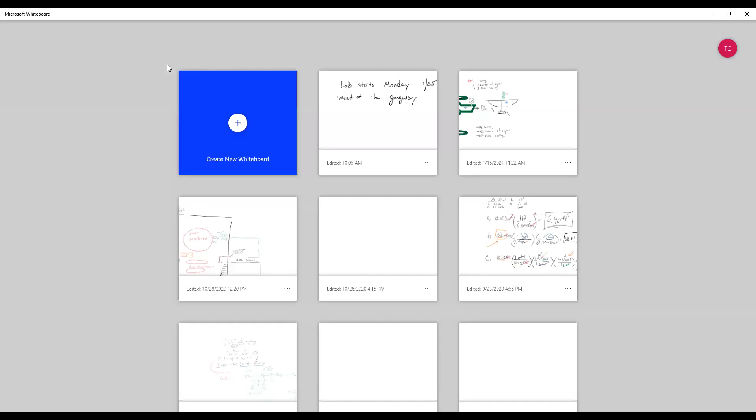Also, going from there, we are in, like I said, a working condition, so you have to be ultra aware of your surroundings. There's going to be deck plates that are up. Don't be walking backwards. Always be aware of what's happening around you. It's probably in a little bit more of a chaotic state than if we were actually out at sea.

So being in the shipyard, things are just going to be different from day to day. You may be walking around on the deck plate and all of a sudden fall through it because there's no deck plate there that day, and there's an opening to the tank below it, so you fall right into the tank. That's a lot of paperwork for me. You get injured, you can't go on summer sea term. Not fun. So be aware of your surroundings.

It's not going to be me teaching the lab, it's going to be first class lab instructors, about 4 per, depending. The only exception is Tuesday at 9, you have 3 because there's only 11 of you. Same with Thursday at 9, you guys are the lucky ones, there's only 6 of you in that class, so you're pretty much getting a one-on-one. You have 2 instructors. Everyone else, you're pretty much maxed out.

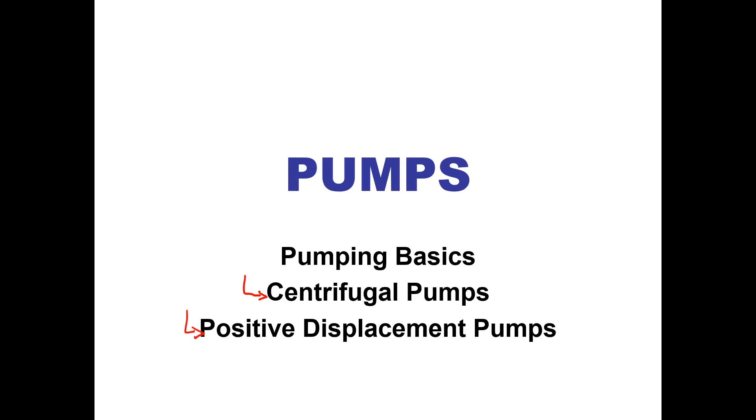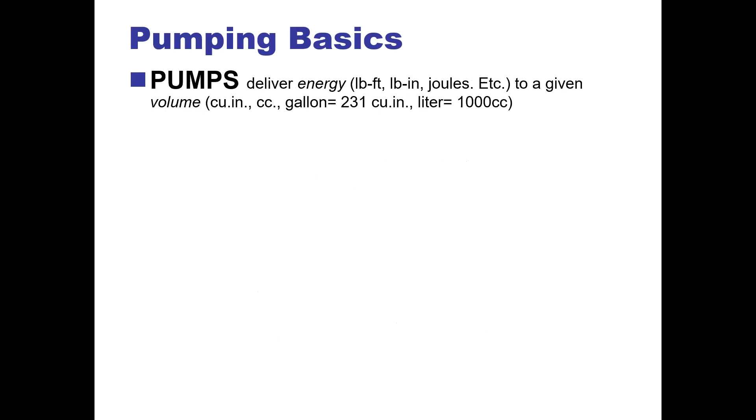Pumps deliver energy in foot-pounds, pound-inch, joules, etc., any unit of energy, to a given volume - so cubic inch, cc, gallons, liters. It's usually thought of as a force over an area, but it's also an energy per volume. That's how we get PSI, so you're always going to be looking at this and seeing what the pressure is coming out of a pump.

So energy gained per unit volume, pounds per square inch, or PSI. Pressure times flow is power - energy over volume times volume over time is equal to horsepower. So we have PSI times gallons per minute over 1714, that's just an arbitrary number basically, and we get horsepower. 1714 is just one of those units that, because it's imperial units, we have to use.

If we look over here, we just have pascals times meters cubed per second is equal to watts. Watts is the same thing as our horsepower, it's just SI.

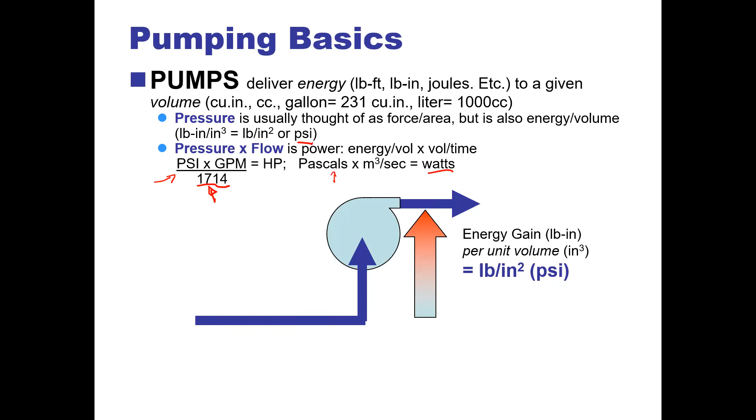So we have something called head. Head energy per pound of liquid, commonly expressed in feet, representing the vertical height of a static column of liquid, corresponding to the pressure of the fluid at the point in question. That's a lot, right? So we'll go over it, don't worry.

In general, a liquid may have three kinds of energy, that is the capacity to do work, maybe due to three different factors.

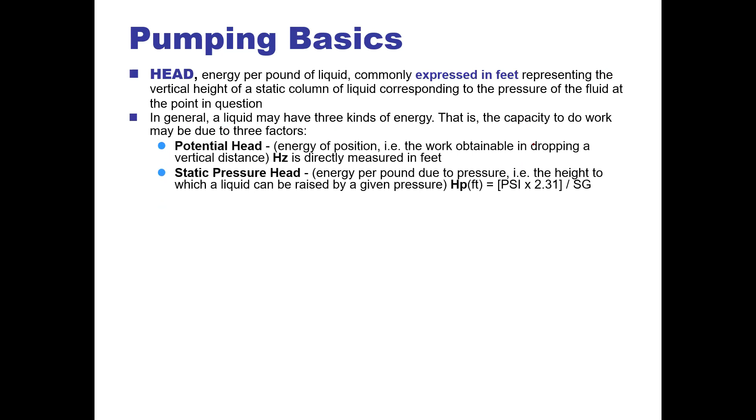We have potential head, which is the energy of position, the work obtained in dropping a vertical distance. And then we have static pressure head, energy per pound due to pressure, the height to which a liquid can be raised by a given pressure.

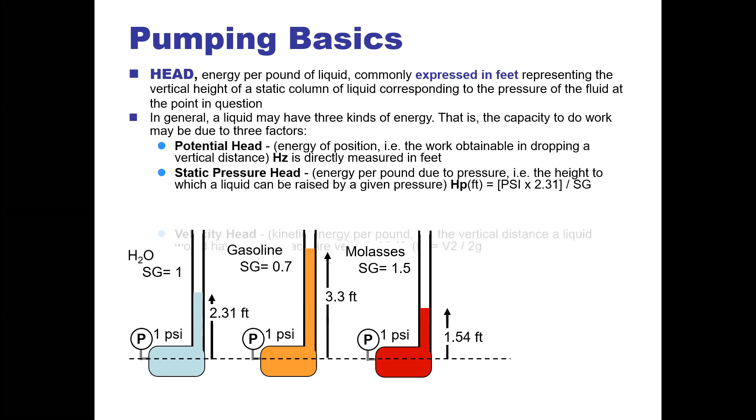Then we have velocity head, or kinetic energy per pound, the vertical distance a liquid would have to fall to acquire velocity. So we can look at this and see that each different type of liquid out there will have a different type of head.

If everything is under 1 PSI, we could see that the column of liquid that's pushed up under 1 PSI is going to be different between water, gasoline, and molasses, all due to their specific gravity.

And then that's our velocity head. How far does something have to fall? The vertical distance a liquid would have to fall to acquire velocity.

Then we have static pressure head, which is down here, that's all static. And then we have potential, the work it's going to obtain by dropping that vertical height. So if you hold a glass of water higher above the desk, it has a potential head.

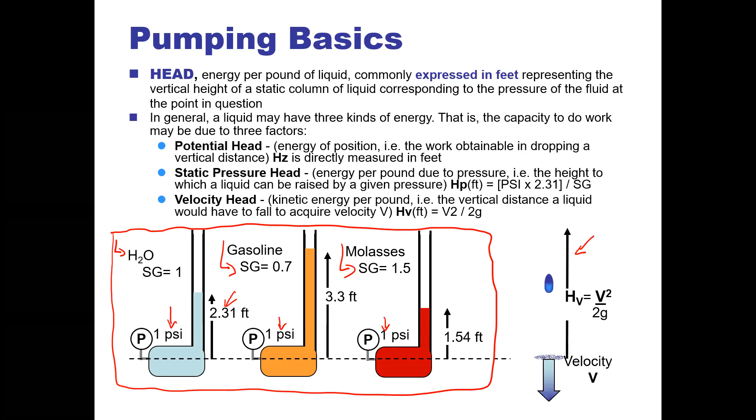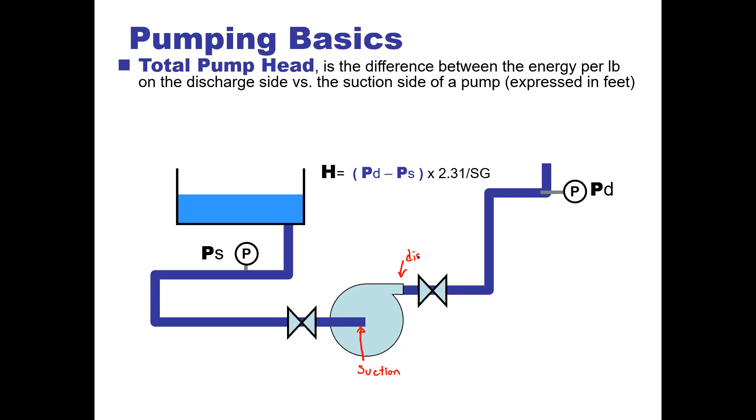Going from there, this in the center, we'll hit this in depth in a few seconds, is our suction. And over here is our discharge. And this is for a centrifugal pump.

So most of the times you can negate that and not think about it. But there are certain times where you will have to, as an engineer who is going to be an operator, will have to deal with this.

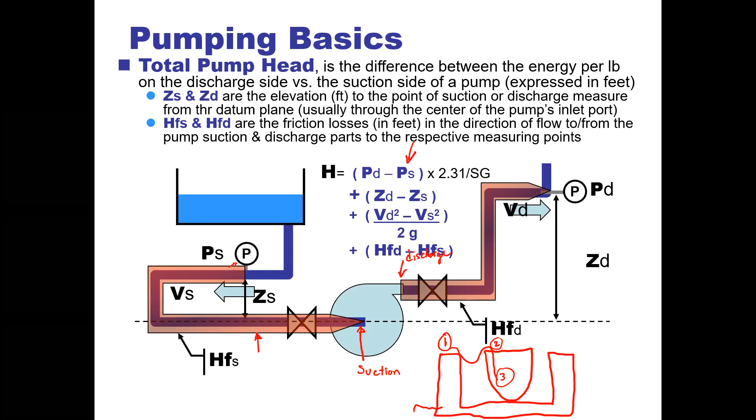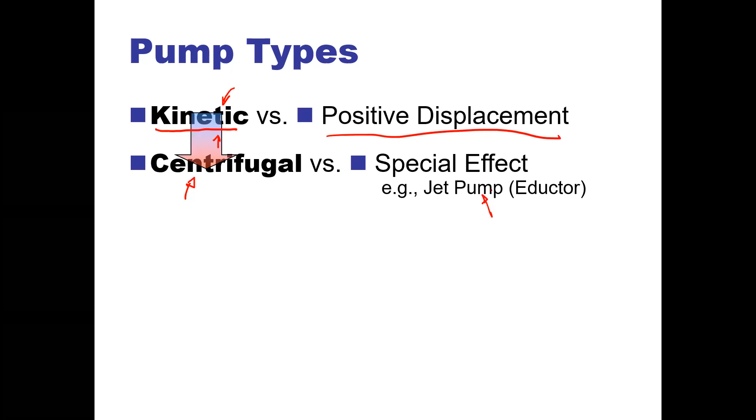So a jet pump is a special type. Inside centrifugal, we have all these different types: we have radial, we have axial, and we have a mixed flow. Most of the time, you will see a radial pump, and then you'll see jet pumps in a very specific type of the industry, and that's in dredging.

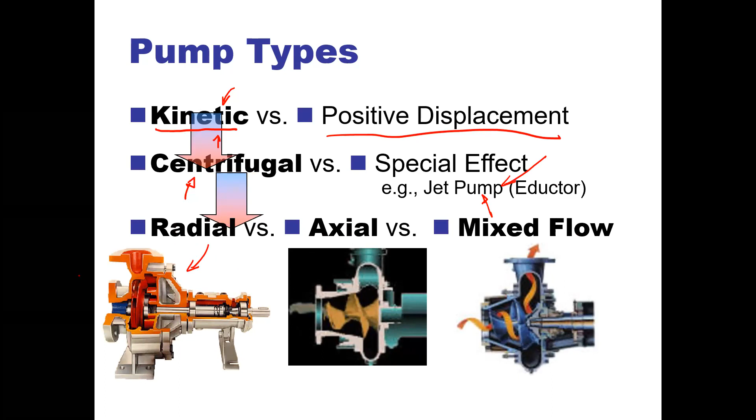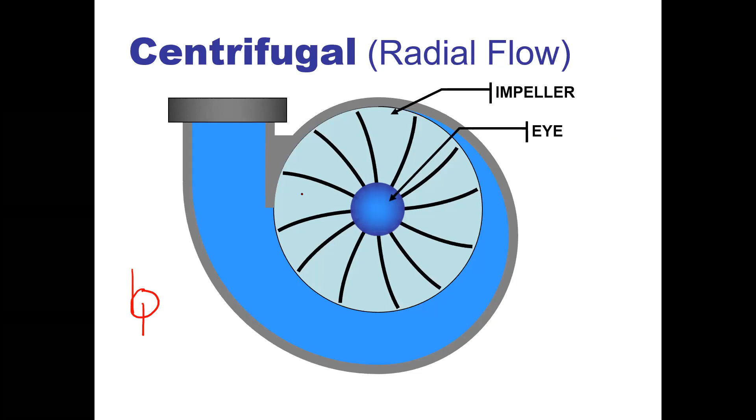So centrifugal is a radial flow. Again, it uses the symbol that we showed earlier, this type of symbol. We have something called the impeller. We have the eye, which is our suction port. We have our volute. And then over here, it doesn't say, but this is our discharge.

Now, notice the way it's spinning, it's spinning in this direction. It follows the volute around as the volute increases in size. Now, if you think about it, you would think that it would want to be this way, right? Because the vanes are pointed in that direction, it has like an arch to it. But if that were the case, it would just be grabbing. It wouldn't be flinging. It wouldn't be imparting its energy onto it. It would just be grabbing it.

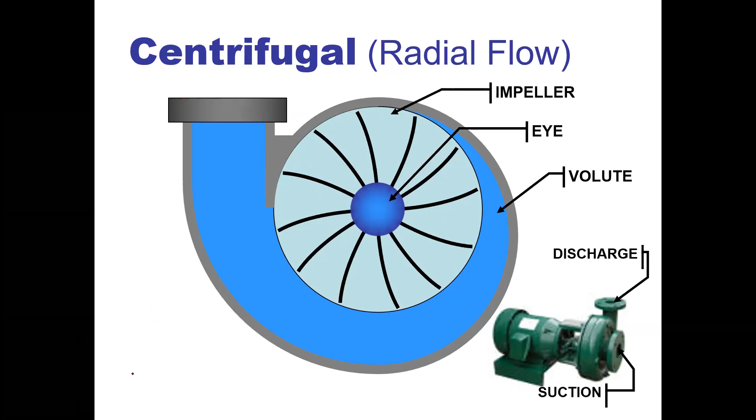So what's happening is these vanes are almost like flinging it and building up pressure as it goes around. So that is the direction these vanes are going to go in. And that goes for any centrifugal pump out there. So it will flow whatever liquid you're going in that direction there.

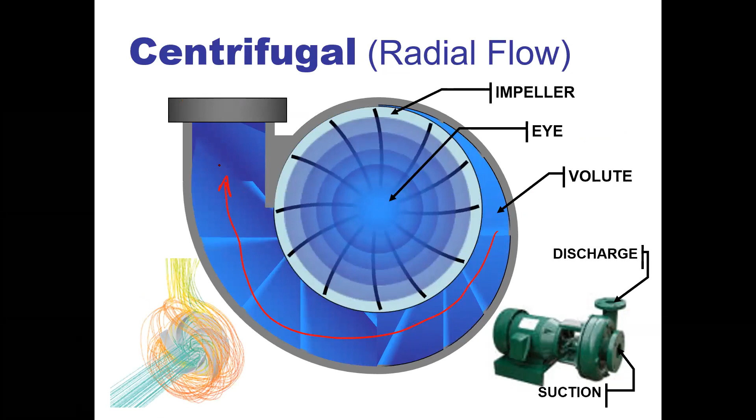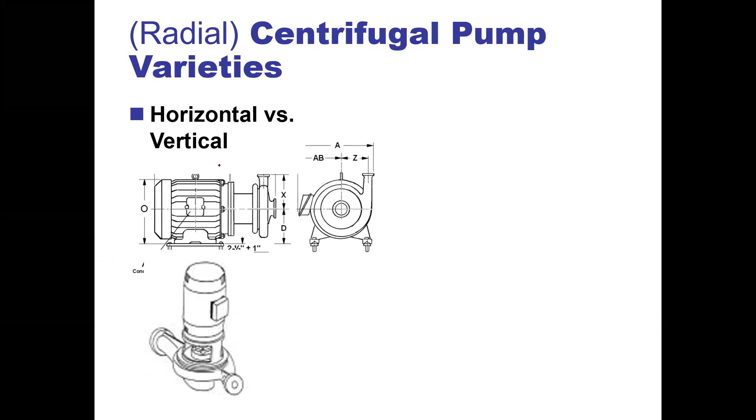So moving forward, we can go horizontal or vertical. We have different types of impeller constructions. Now, if we're in a horizontal position here, you could see that this is our suction and this is our discharge, right? Pretty easy to see.

But over here, could you tell easily? No, you'd pretty much have to crawl underneath and really take a look at it. Or it'd have to be labeled. We can kind of tell on this one because it's really shown in the drawing. If you look, this one over here dives down into the center, and this one over here comes out and is almost enlarged on this side. So this is going to be our discharge, and this will be our suction.

So you just have to know the basics, that the eye is the suction. Know the construction isn't going to really change. You're still going to have a skinny part, and then it's going to be a larger volute over there on our discharge, no matter what. So look for that. You can see this side has a larger volute where it's skinnier over here. This must be our discharge. Just use the clues. Look around. It's not always going to be labeled with a simple arrow pointed in the direction you think it's going to go.

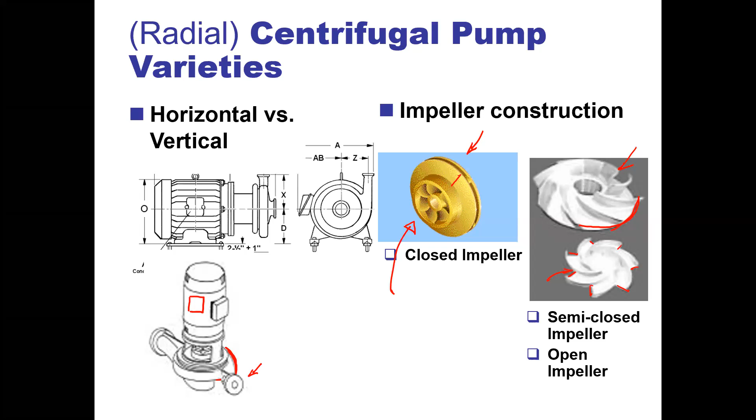So now we have single suction. With single suction, we only have one location where we're going to be pulling a suction from. It looks like it's going to be having a double discharge, but that's not correct. Remember, it's going to be spinning in a circle. We're going to have that volute that's going to be around.

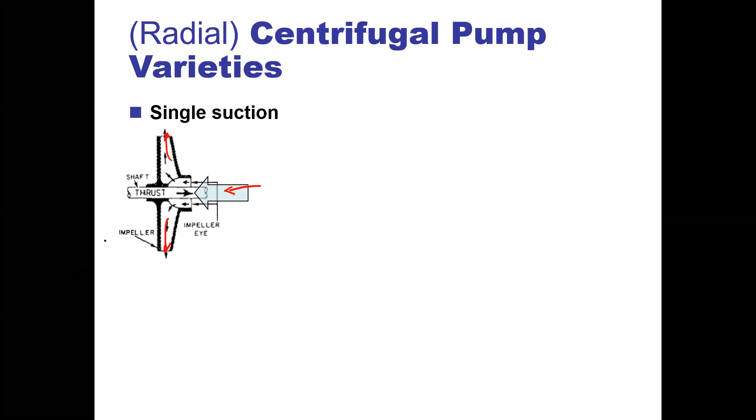Now we have a double suction. That means on both sides of the impeller, we will be sucking in fluid. Again, we're not having a double discharge here. We have that volute all the way around.

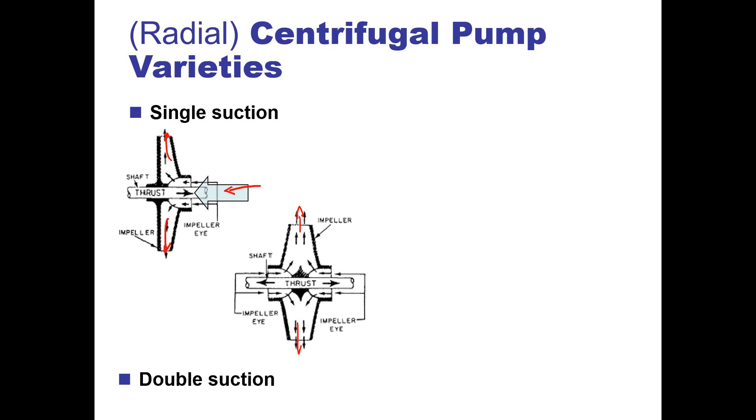And then we have something called a multi-stage. A multi-stage will basically have one centrifugal pump after another, in succession. It'll go from one into an eye, come out, go back into an eye, come out, go back into an eye, come out, go back into an eye, and then finally discharge out.

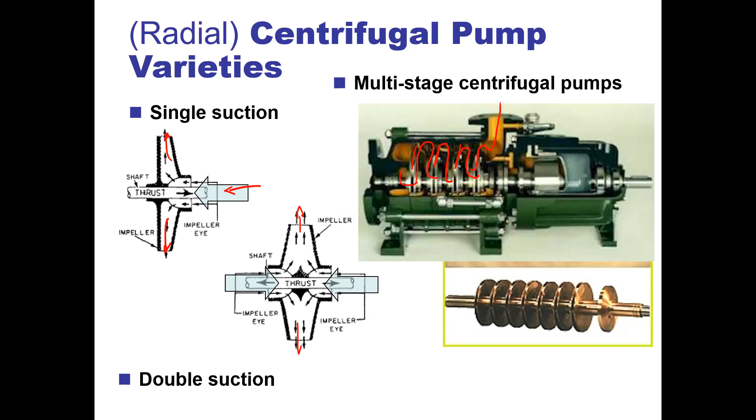Now, we're going to talk about pump characteristics. So we're using a chart here. Our y-axis is pressure, our x-axis is flow in gallons per minute. Pay attention to what's happening up here.

So, of course, with anything, we know we have an ideal line, what our math tells us should happen. But then we have our line in actuality, what the real world will show us. What's showing is right here, as we are going to stay steady state in our pressure technically, we're going to slowly increase our gallons per minute. But in reality, the more we increase our gallons per minute, we are actually going to fall off and will reduce our pressure. So the more gallons per minute we're seeking after, the less pressure we'll have. We can actually see that line is a little off. Let me switch to something that will stand out, so we'll go green.

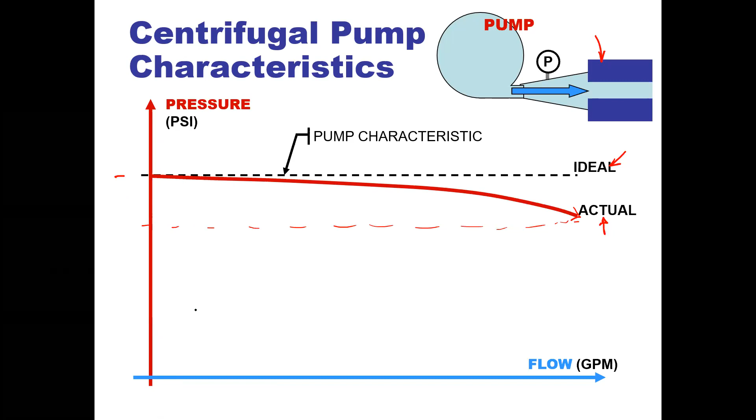All right, so then we have our system characteristic line. This is our actual system characteristic. And like anything in engineering, we're going to follow our chart. You stick one finger on this line, follow it until you stick your finger on this line, and those two fingers meet up. It's like any other table chart out there, you're going to follow it until they connect.

And the reason for that is because we're using our pump's characteristic line and our system's characteristic line. Just because our pump can exist over here doesn't mean that our system can take it. We may not have a large enough pipe on the outlet that can take that amount of gallons per minute all the way over here.

So we are going to operate here for this system. So if we enlarge the system, if we go from, say, a 2-inch pipe to a 4-inch pipe, well, now we can operate over here. So we increase our pipe size. We went from a pipe size that was all the way down here and restrictive to something that's more free flowing. So pay attention up here as you're looking at it on your own.

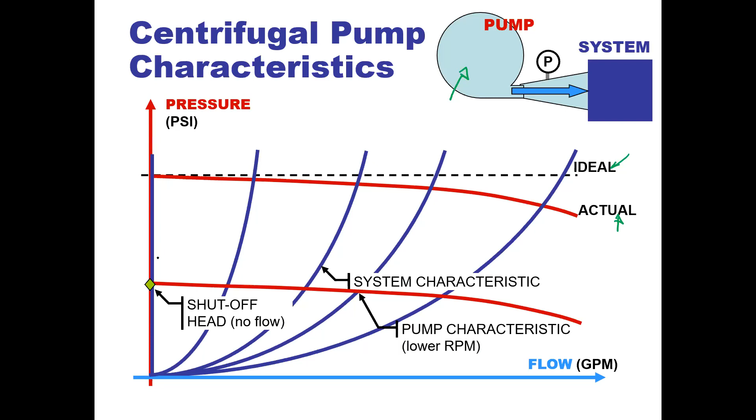Anybody else any questions? All right.

From there, we're going to positive displacement. Again, these are the two big different ones. Kinetic or centrifugal versus positive displacement. Now, inside positive displacement, we have reciprocating and rotary.

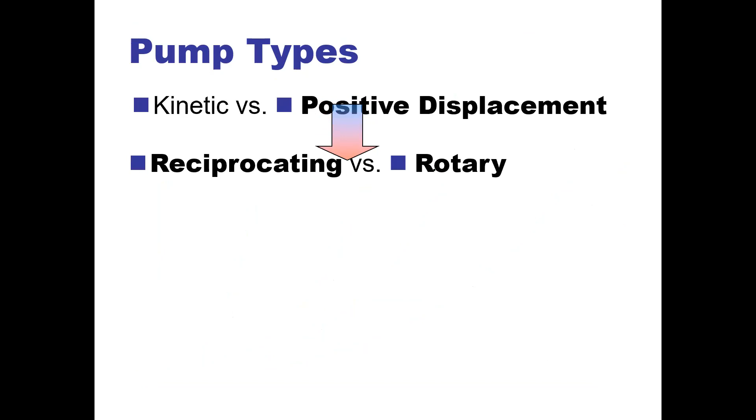Inside reciprocating, these are two different types that we're going to be seeing animated through this. So in reciprocating, a fixed volume, and that's the big thing. This is positive displacement. It's a fixed volume that is pushed through with each stroke. And in a revolution or rotary, every single time it spins, again, a specific volume. It's a fixed volume.

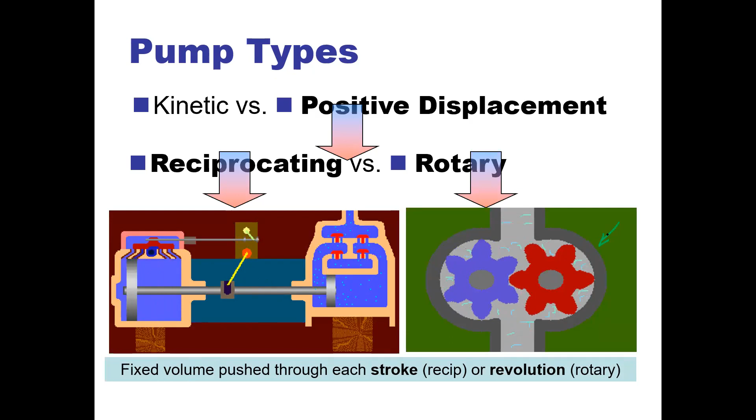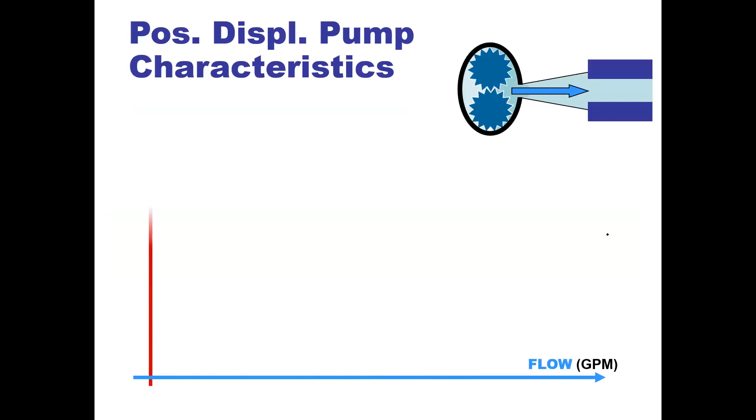We're going to go right into a pump curve on it. All right, now.

Positive displacement pumps, knowing that a fixed volume comes from them, what would be considered a positive displacement pump in your house? Everybody would have one, at least I hope. A fixed volume, no matter what happens, environmental conditions, anything. What is something that would be considered a fixed volume pump, a positive displacement pump in your home, everyday use? This isn't like in your boiler or anything like that.

Would it be in your shower? What would it be in your shower? Because it's usually always like a consistent flow, a consistent pressure. All right, so that, depending on where you live in the world, is going to be based on a head pressure. If you're out on the island in the suburbs, you have those water towers. Those go down into that, and sometimes you'll have a hot water circulating pump. That's actually centrifugal, so that's going to be a constant pressure.

In the toilet? Toilets, again, that's based on a type of siphon. That's how toilets work, where they have their flow. Good guess.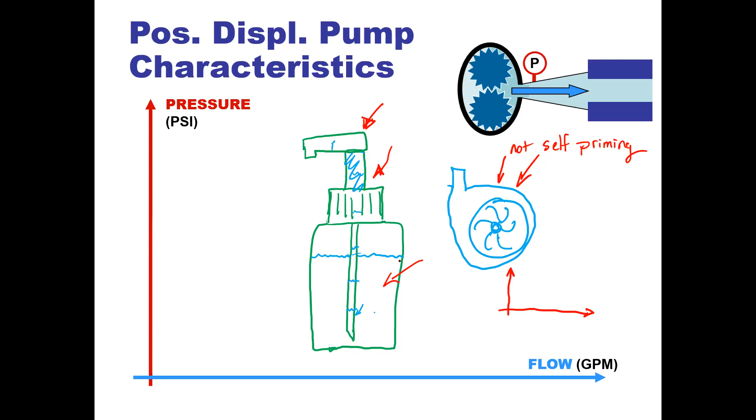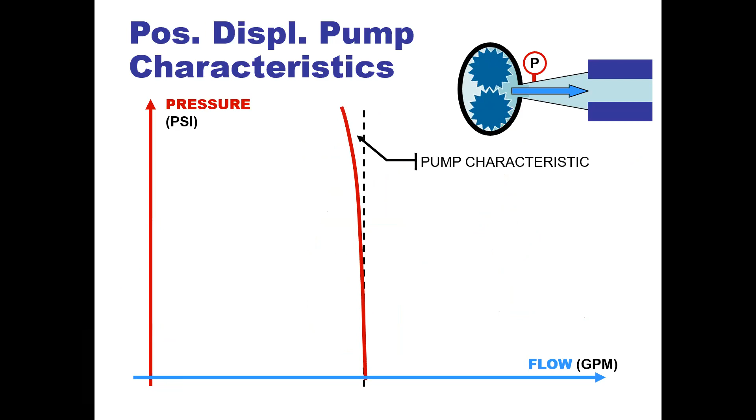So really quickly, this is the major difference. We're going to go back into this next class on Monday, but this is the big difference here on how our charts differ. This is why I was saying, if you know these charts inside and out, you will know these pumps.

Look, we have constant flow. Our actual and our ideal are very close to each other. We will always have the same flow when this thing goes on because it's going to have a fixed movement.

You're basically moving the same amount of fluid no matter what happens, the same volume. As soon as you turn it on, boom, this thing is on, and it's going to be moving however many gallons per minute at that point.

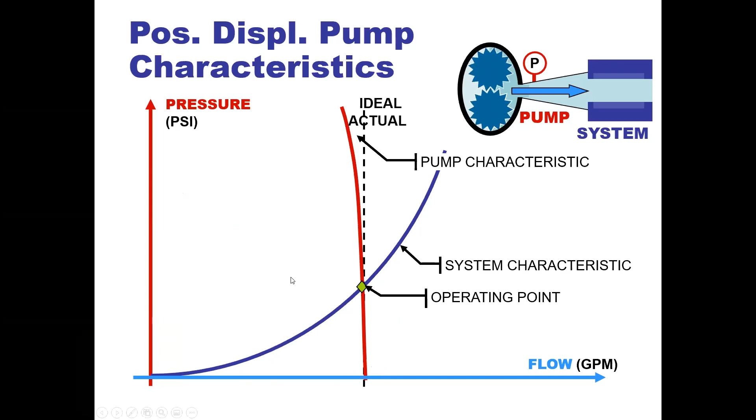Now let me see what's going on over in this world of our STCW stuff. Oh, is anybody able to get John Forrest on? Is he in? Oh, he didn't answer my text. You didn't? No, all right.